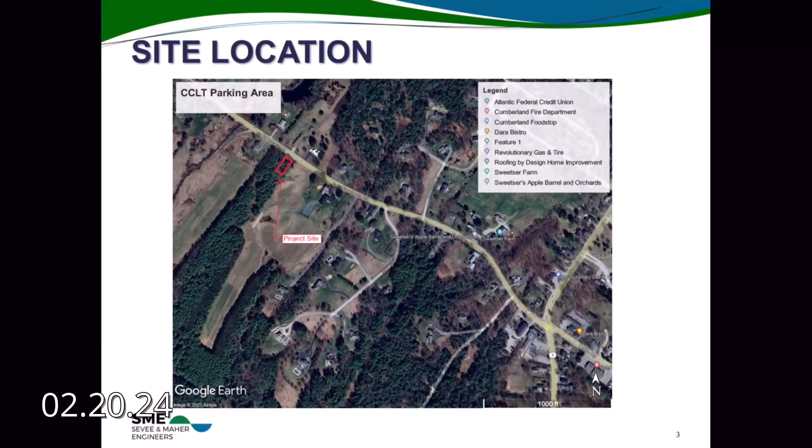Just as a refresher, the red area here is going to be the location of the parking lot. That has not changed since the original approval. What has changed is the location of the parking lot access. The lot is still 8 spaces with 1 ADA van accessible space. Construction will be the same, a gravel buildup with reclaimed asphalt. Some of the disturbed areas, impervious areas, and wetland impacts have changed to reflect the new access location.

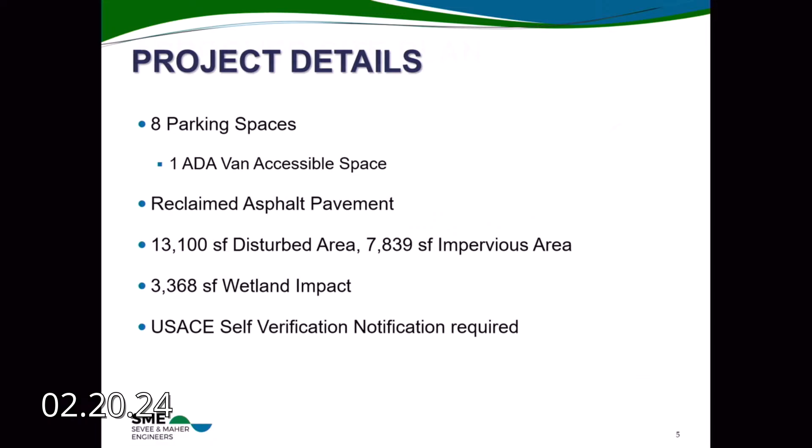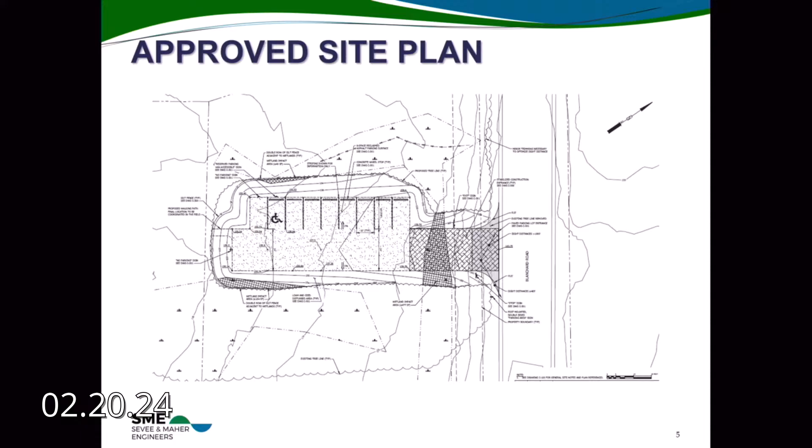Just as a refresher, the original approved site plan looked like this. We had a straight entrance coming off of Blanchard Road down into the 8-space parking lot. Because of the slope requirements and elevation changes, that required a substantial amount of fill underneath the parking so that we would have acceptable grades coming in off of Blanchard Road. What we have done instead, and what we're proposing today, is this configuration. The parking area is in the same spot. We had reversed the hammerhead. If you can see here, my cursor is now on this end, and we shifted the site entrance a little further to the southeast, where we're able to come in over a greater driveway distance, come down to a lower elevation, and save on that fill.

The item that Carla had mentioned, shifting that driveway down on the page, relates to an existing fire hydrant here. Through the peer review comments, we're coordinating both with the local fire department as well as the water district to achieve an acceptable distance off of the pavement. Where we landed is that we're about 4.5 to 5 feet off the edge of this radius. We have a bollard located 3 feet off the hydrant per the fire department's request to protect that.

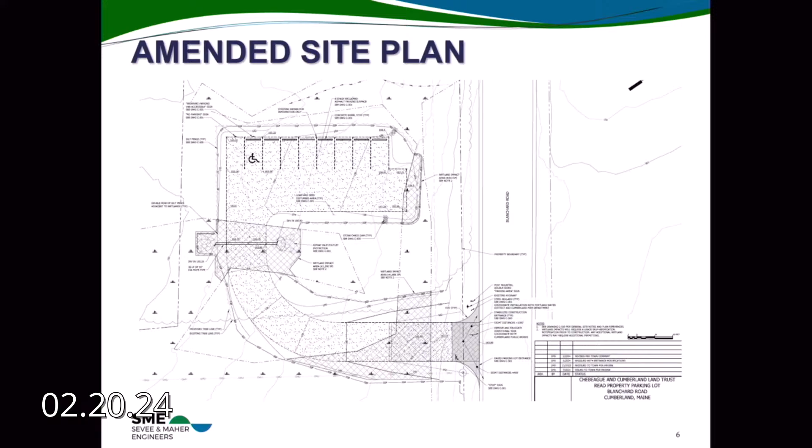I received an email from the water district saying they were satisfied with the changes on Friday. I also received an email from Dan Small, the fire chief, today saying he was fine with the changes. And this is what we're here to present tonight.

So, questions from the board? Quick question. Could you bring up the picture of the amended site plan?

Sure. Could you talk to the new location of the entrance and how it relates to the two driveways on the other side of Blanchard? Let me see if I can, hang on just a minute. I may be able to do this better by pulling up a set of the project plans, because it doesn't show in the slide that I had there. So bear with me here.

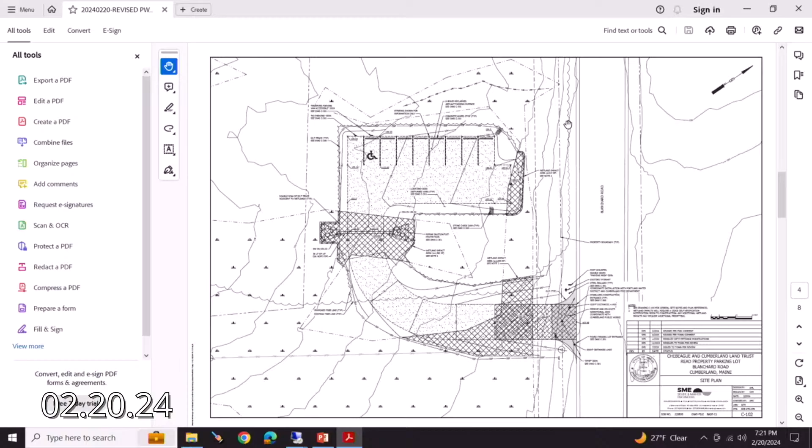Where's my full screen? May not be able to show that on this. Go back to this here. So, if I can zoom this in. There we go.

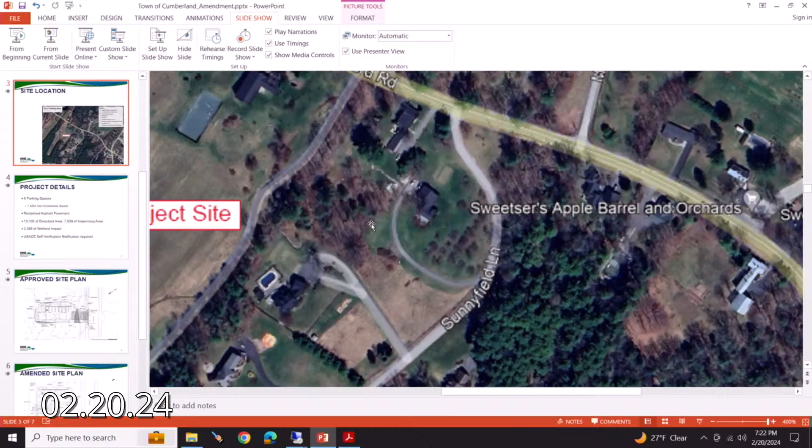You can see here, apologies for jumping around on this. Again, the parking area hasn't changed at all. Where we were coming in previously was off the center of this box, which is a little off from that existing driveway, the longer driveway across the way. This is going to be coming out now a little bit to the south, a little bit more in line, but not quite over as far as this existing driveway on this other side.

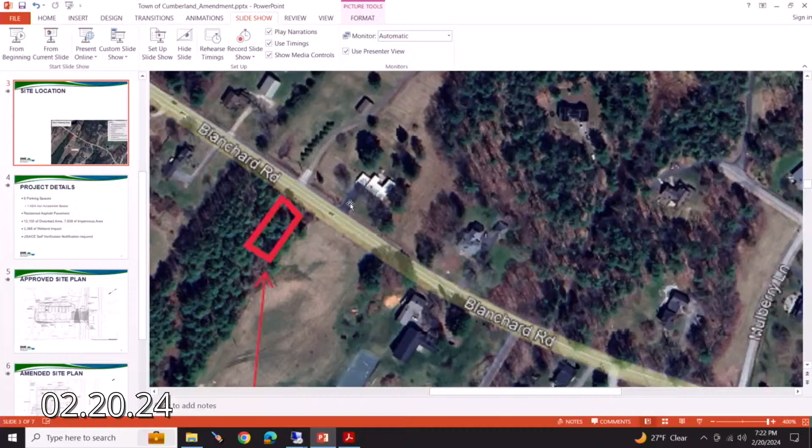Okay, thank you. Sure. Other questions? Paul? Yeah, just a couple things.

In the intro, there's a comment that there'll be a directional sign on Range Road. I think that should be Blanchard. It should probably be Blanchard. Just pointing that out. It might have been on the original.

Next, on the second page, under site plan, there are a number of issues raised by the engineer, one regarding grade. So has that all been addressed? Yes, they have been. In the initial design, we were trying to come down into the property as quickly as we could. We followed a residential access road standard for less than 50 vehicles a day, which included a 3% grade coming in 25 feet off the edge of pavement, and then from there, we came down at a maximum driveway grade of 10%.

In response to the comment, we shifted and adjusted that to the regular site plan standard, which is 3% off the edge of pavement for 50 feet. I'm not sure if you can see it, but we included some spot grades here as well. These spot grades represent 25 and 50 feet off the edge of pavement, and they outline 3% coming into the site. From there, we went to an 8% grade down and around the corner. So those comments have been addressed with this design.

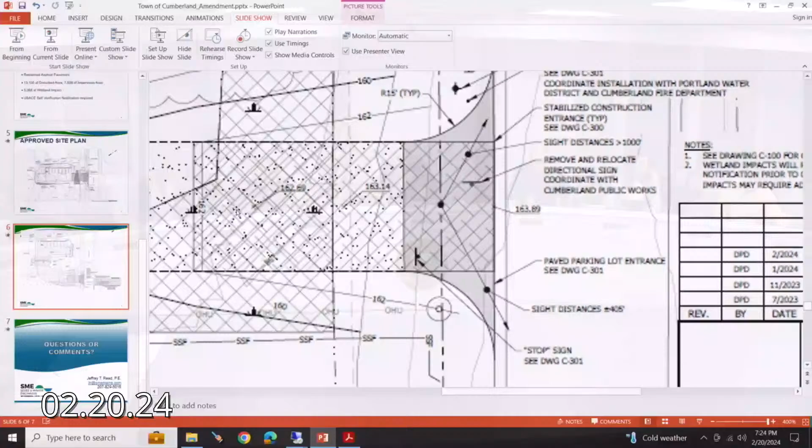Amendment to an approved site plan for an 8-space parking area for access to Rines Forest to be located, okay. So it is 48 Blanchard Road, correct? Yes. Good, okay.

Other questions, oh excuse me. Do you have the letter from the Maine Historic Preservation Commission? Yeah, we submitted that last week.

In the findings of fact, regarding sight lines and utilization of traffic circulation parking, we say that the sight distance is 350 feet in one direction, which would meet the standard, but it would be right at the standard, and 485 in the other direction. In your application, it says 405 feet in one direction and 1,000 feet, or greater than 1,000 feet in the other.

So it's the larger of the two. I mean, I went out there and I measured it myself. Okay, so we just need to adjust our findings of fact. Thank you.

Anything else, Josh? That's all I've got. Any other questions from the board? Hearing none, I will open the public hearing for anyone that wants to address this subject.

Hearing none, I will turn it back to the board. We have no waivers, is that right, Carla? As the town engineer stated, and I highlighted it in your review on page 2, the third waiver was requesting a marking of all trees greater than 10 inches in caliper. The clearing proposed will be minimal, and trees over 10 inches are not common in this area, but he suggests making sure the planning board doesn't want a survey. We already approved them before, just want to make sure you're good with it again.

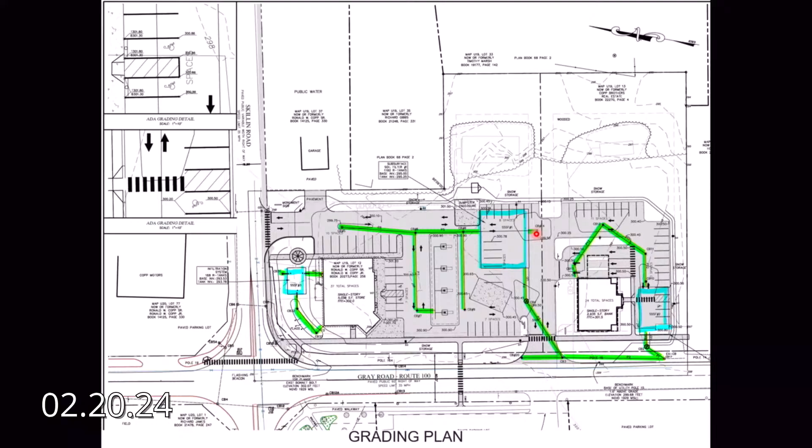The utilities will be mostly extended from the adjacent roads. The blue highlighted lines are water, yellow is gas, and we will come underground from existing utility poles for data and electric. Each site will have its own septic system, set to the rear of the site, designed by Albert Frick Associates.

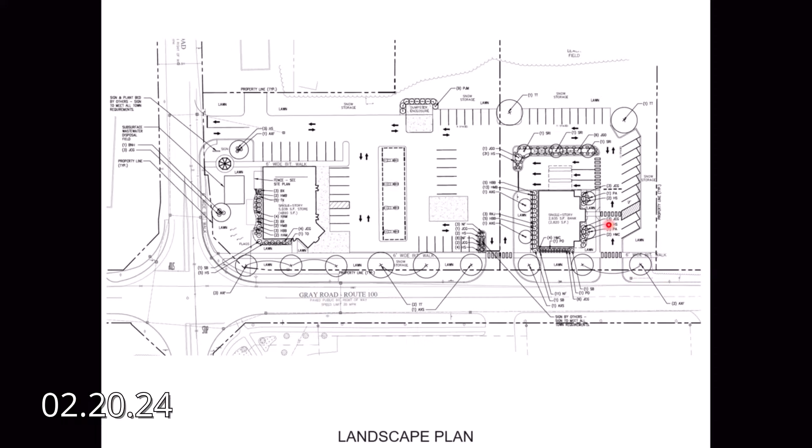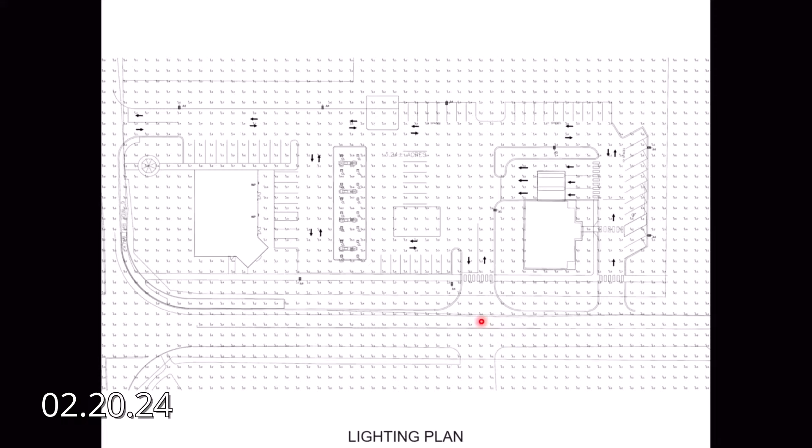Those are going to be set basically at grade, and again, that's part of what the DOT asked for, but it's always a good idea because we're really looking to service the neighborhood, and if folks want to walk to us, they should be able to do so safely.

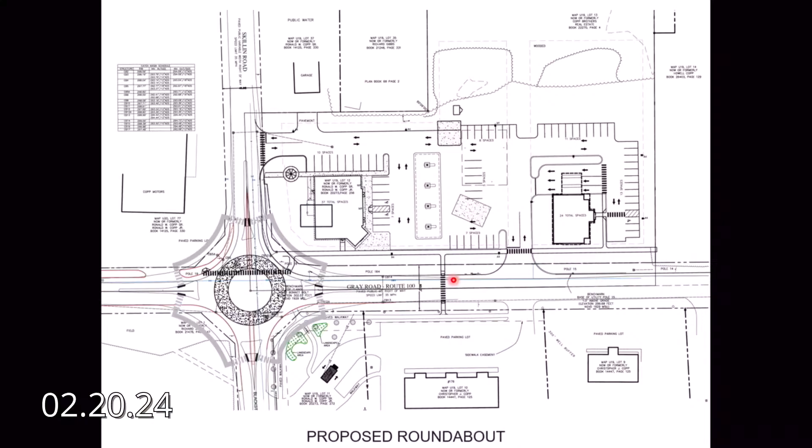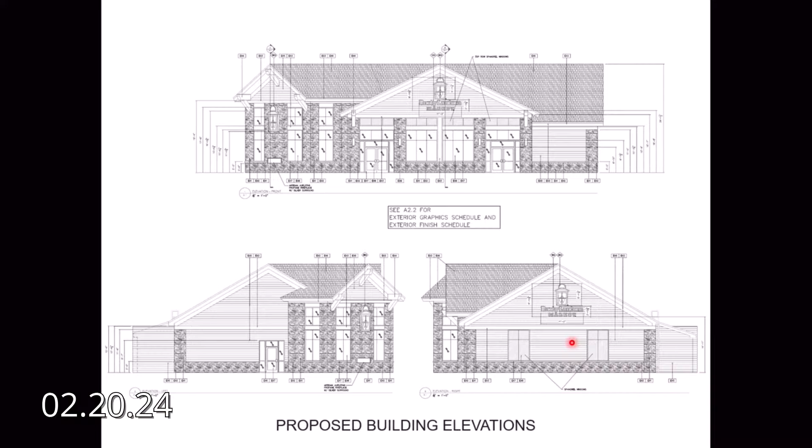So this would be the view from the parking lot, and this is from the side you would see from Skillen Road, and this is the other side. But we've got much better architectural renderings from a company we use called Pepperchrome.

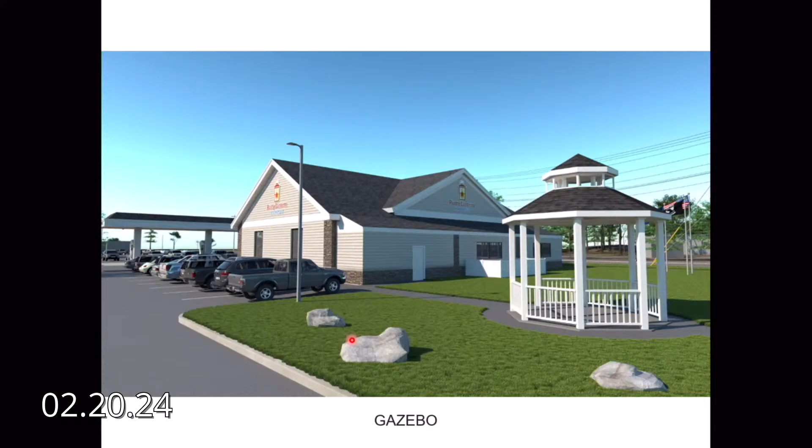We have several more views here, I'll step through. As seen from Skillen Road, you would see where that gazebo was proposed. There's a fenced-off area over here that is where the HVAC equipment will be set at ground level.

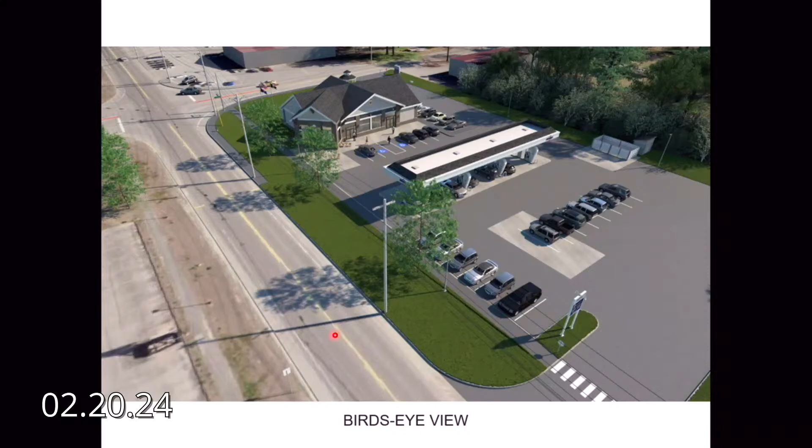A bird's eye view, if you're able to jump real high. It does show the spacing and how things are laid out.

These are the tanks, and realizing that people will likely park out here, we've designated some parking spaces on the plan. It's raised a couple of questions from folks about why they're there and what's the impact of the truck moves through there. If it's something you'd like to discuss or give us feedback on tonight, we'd be happy to hear it.

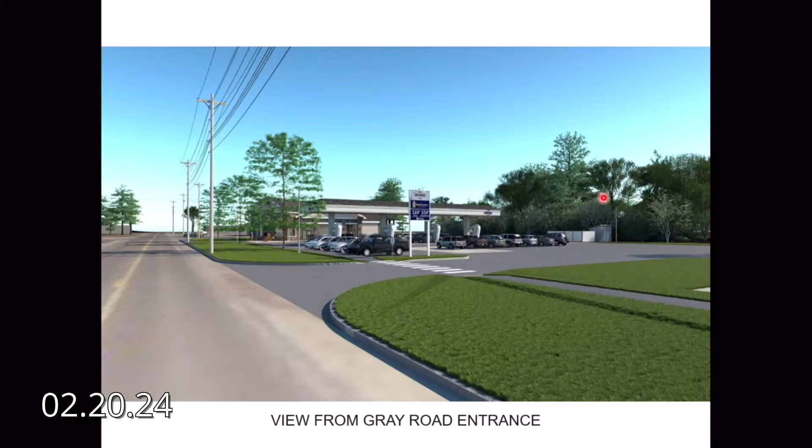Again, the view as if you're approaching from the south. This is not the actual sign, but we are proposing a pole sign here with downward-facing lights.

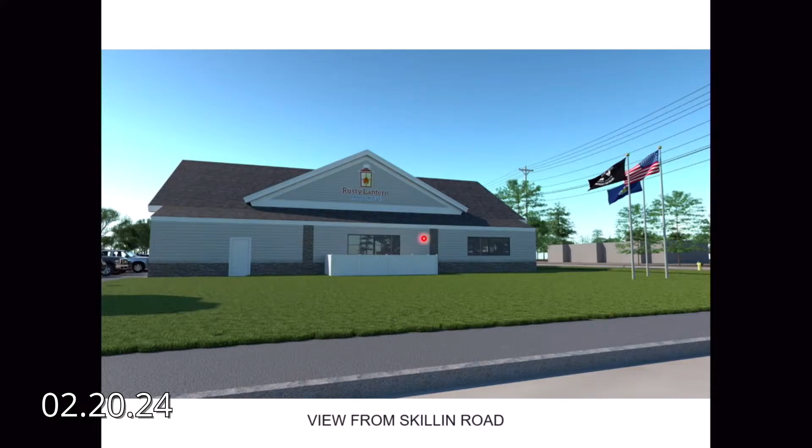This would be a view if you were sitting or approaching the intersection from Skillin Road. Again, fenced-off HVAC equipment.

We'd like to put flags on the corners of these — I don't know if you've been to the Lisbon store, you'd see that there. This is the cross on Blackstrap Road, looking back at the site.

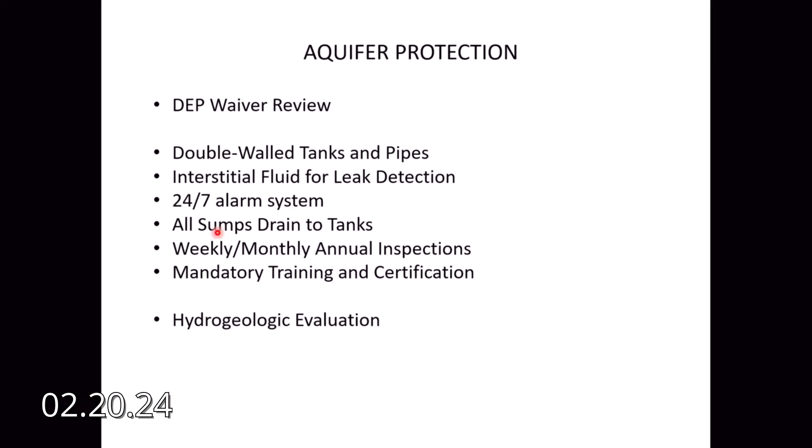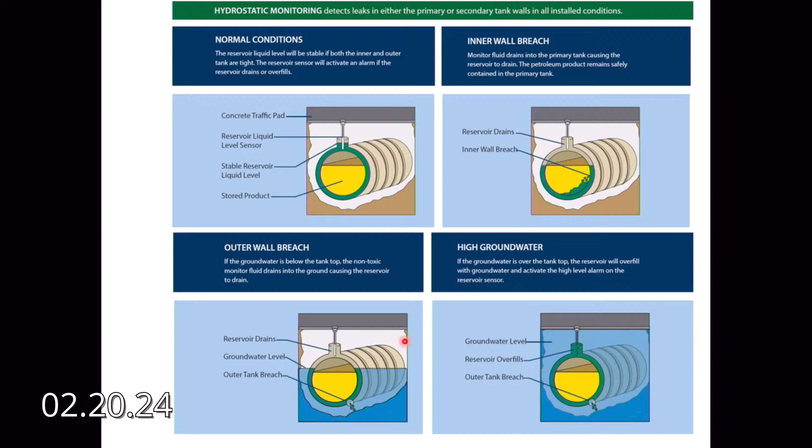So with this double wall tank technology and double wall piping, I don't know the statistics in Maine, but we just did one of these in New Hampshire, and they had not had a leak that got into the environment since they started mandating them about 15 to 20 years ago.

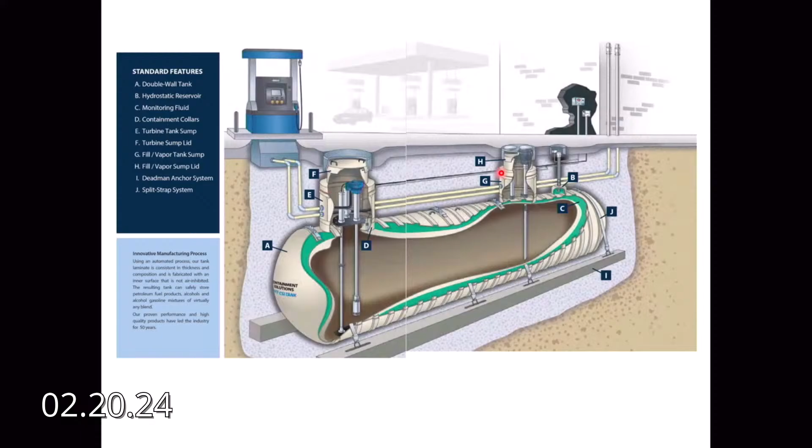That's just another picture kind of showing the same thing. You can see the green areas. Underneath each of the dispensers, there's also a sump, so that if anything were to drain or leak internally, it drains back to the tank. This shows vents, and this shows that you would have the alarm panels inside the building. So the technology has really come a long way. These tanks are inspected weekly at the fuel ports, monthly, and annually. The DEP only allows them to be in the ground for a certain amount of time - 20 years, unless you get a 5-year extension. So they're closely monitored to make sure they're safe, regardless of whether or not you're in a designated aquifer protection zone.

In addition to that, these are just some of the products that Rusty Lantern has to train and help people in case of a problem - a heavy emphasis on safety procedures, training and certification, guided both by the state and the EPA. So every operator there, meaning anybody who works at the gas station or convenience store, has to have proper training and know how to respond if there's any sort of incident, and again, frequent inspections.

So in addition to that technology, I just want to turn it over briefly to Lisa Jacob with Sevee & Maher, who with her colleague helped prepare the hydrogeologic study.

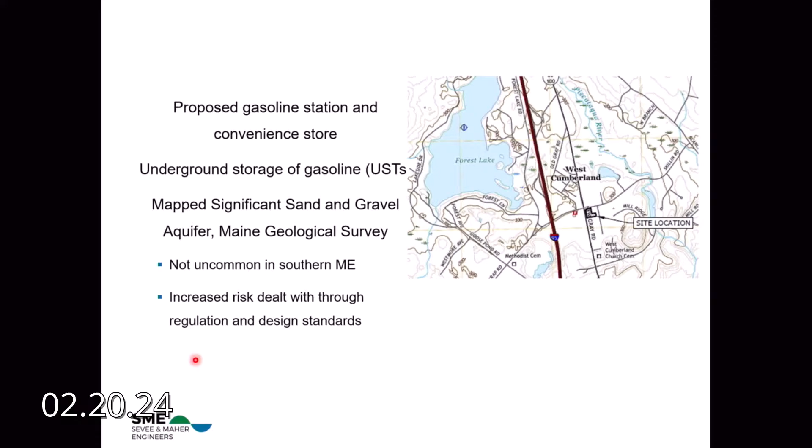A couple of examples of that include in Cumberland and surrounding towns, including in Gray and also in Windham.

We've got the site location here called out, if you can see me moving around. The site location within the Maine Geological Survey mapped sand and gravel aquifer is in the yellow.

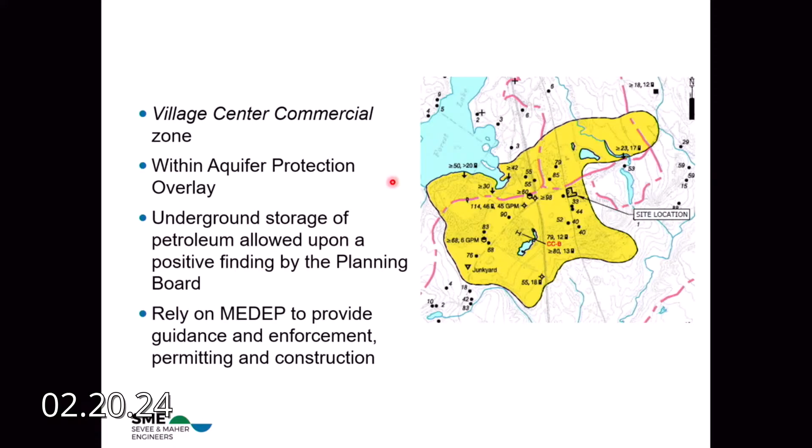This slide is meant to cover Cumberland zoning and aquifer protection matters. As we know, the proposed location is in the Village Center Commercial Zone. It's within the Aquifer Protection Overlay. Underground storage of petroleum is an allowed use upon a positive finding by the Planning Board that the use would not adversely affect groundwater. We understand that the town would rely on Maine Department of Environmental Protection to provide the guidance and enforcement that would govern the permitting and construction of underground storage tanks in the aquifer.

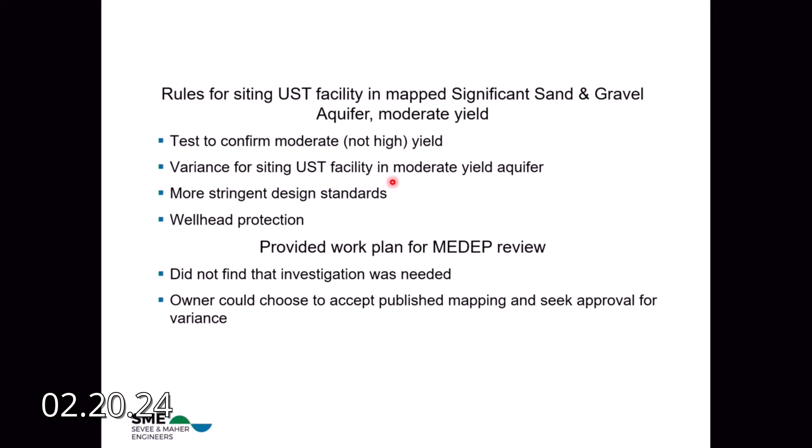The next slide is meant to cover Maine DEP requirements - the rules for siting a UST facility in a mapped significant sand and gravel aquifer of moderate yield. The requirements would include testing to confirm it was a moderate rather than a high yield aquifer, application for a variance for siting a UST facility in a moderate yield aquifer, more stringent design standards for the tanks themselves, as Kurt was walking us through some of the additional features, and wellhead protection.

We had provided the work plan for the hydrogeologic investigation for the Maine DEP to review. They did not find that investigation was needed, and they provided the opportunity for the project owner to choose to accept the published mapping and seek approval for a variance on that basis. The project owners decided they would move forward with the geologic and hydrogeologic investigation to better characterize the site, to understand groundwater direction and general velocity, and to be able to answer questions that may come up as part of this process.

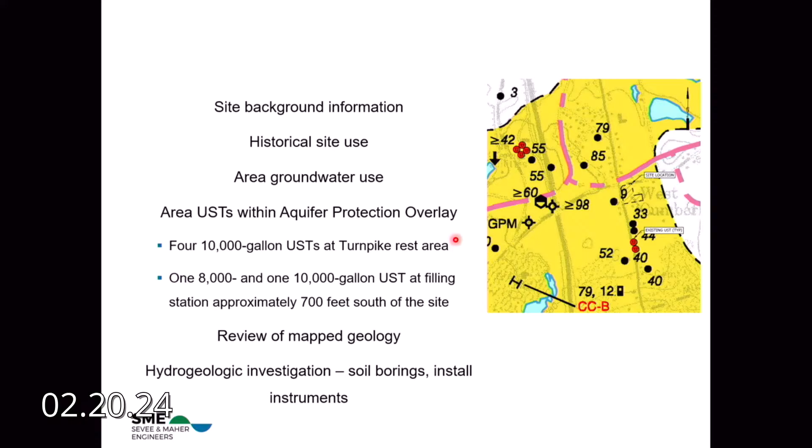There are four USTs of 10,000 gallons each at the Maine Turnpike rest area, and there are two USTs, 8,000 and 10,000 gallons in size, at a filling station about 700 feet south of the proposed site. So we took a look at USTs that already exist, mapped geology including the Maine Geological Survey sand and gravel, the surficial geology, and the bedrock geology. Then we planned this hydrogeologic investigation, including soil borings and installing instruments to be able to take readings from.

We established 4 soil boring locations at the approximate corners of the active site, drilled and observed and classified soils at each, and drilled down to a confining layer. In the southwest corner, we reached bedrock, which was the confining layer. In the other 3, we didn't reach bedrock, but reached a clay layer. In each case, bedrock or clay would confine the flow of groundwater. So we drilled down to a confining layer, classified soils, and installed instruments for future measurements for the hydrogeologic investigation.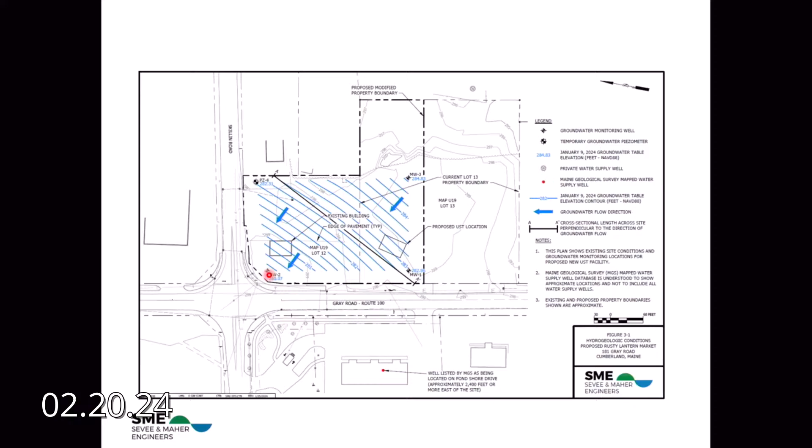This isn't meant to discuss soil and water quality, which were not the primary focus of this investigation. This investigation was planned to look at geology and hydrogeology, prior to when the property owners engaged in environmental due diligence. They hadn't yet conducted a Phase 1 environmental site assessment. So we started drilling in the northwest area of the site and made observations of evidence of contamination.

This was based on field screening, visual and olfactory observation, and screening with field instruments. This contamination was in the soils above the water table, and in soil and groundwater at the water table in this one location. We communicated our observations to the project owners.

They communicated with the property owners, had discussions, and identified that the property was developed as a gas station in 1957, I believe under previous ownership, and operated until 1989 when the tanks were removed.

Since the time of our field work for this investigation, the project owners have embarked on environmental due diligence, launching a Phase 1 environmental site assessment that is underway now, reviewing environmental records of the property and any state, federal, and local records relating to the site or surrounding properties. The project owners have also engaged us to conduct a baseline groundwater quality monitoring program, which is underway right now. Again, this wasn't the primary focus of the investigation, but there were observations we can share with you at this point.

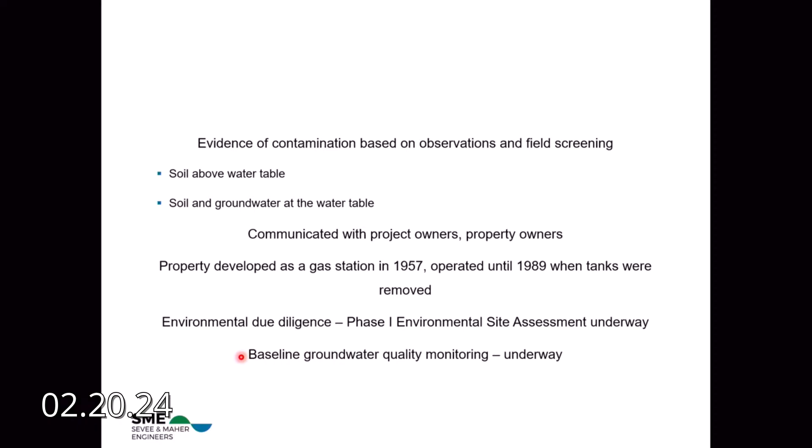And then the primary focus was, in fact, the hydrogeology. Here are some of the summary statements of what we found.

The average saturated thickness of permeable soil — these are the sand and gravel soils that make up what the Maine Geological Survey has mapped as a significant sand and gravel aquifer — averages about 6 feet in thickness over the 4 soil borings that we drilled and installed.

The water table is between 15 and 19 feet below ground surface, and the clay or bedrock confining layer we mentioned is between 20 and 26 feet below ground. So, water table 15 to 19 feet, with an average of about 6 feet of saturated thickness. We're headed toward the margins of the aquifer at this location, which is consistent with how it's mapped on the Maine Geological Survey mapping.

Groundwater flow direction is to the northeast — I'll show the map again in a minute so we can look at this in plan view — to the northwest. And the average linear groundwater velocity is approximately 2.4 feet per day.

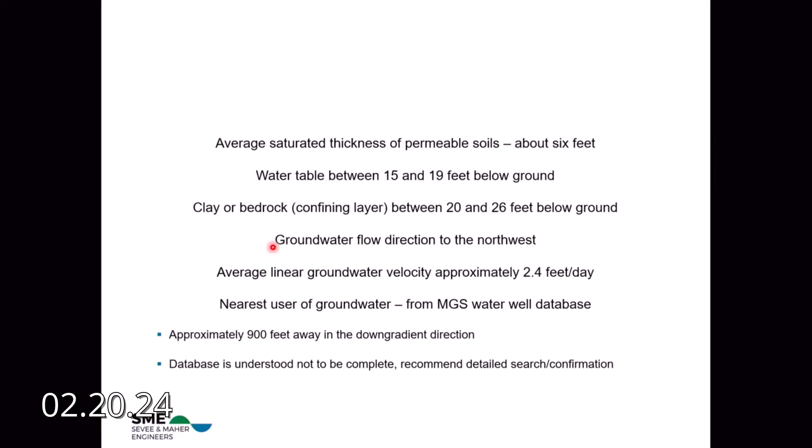The nearest user of groundwater, based on the Maine Geological Survey water well database, is approximately 900 feet away in the down-gradient direction. I'll stop here to issue an apology — we found a typo in our report in 2 places where instead of 900 feet, we wrote 1,900 feet. Apologies for the trouble. We've let Kurt know, and we'll issue revision pages that should make their way to the information you have. But it's 900 feet away in the down-gradient direction.

We understand that database is not considered complete, so one of our recommendations has been to do additional detailed search and confirmation of users of groundwater. The nearest user of groundwater in the up-gradient direction is a water well on Kathy Lane, about 314 feet from the edge of the tanks, from the nearest part of the tank. Again, this is in the up-gradient direction.

Groundwater is, according to the observations from this hydrogeologic investigation, moving from southeast to northwest. Let's see what else I wanted to call out to you — those were all of the summary points I had set aside. I can stop there and either turn it back over to Kurt or hear questions.

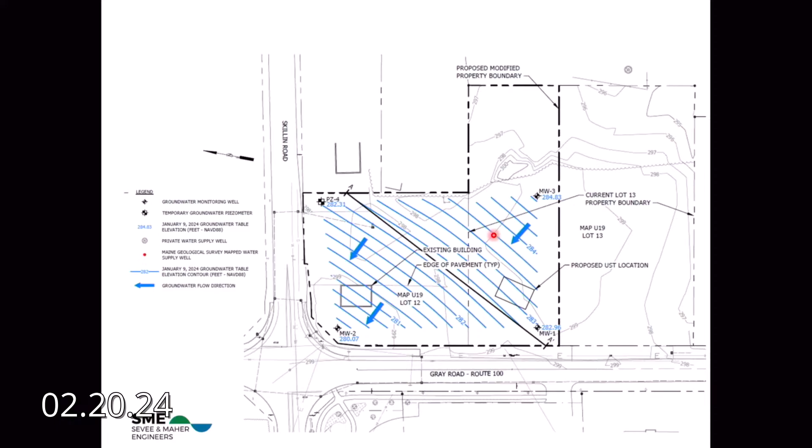Why don't we go to Kurt, and then we can do the... Thanks very much. Thank you, Lisa.

So I'm not going to go through this in depth. Carla asked that I consider the Route 100 design standards as it applies, and certainly when we come back, have a much more detailed review of that. But just looking at them in general, this site does comply or addresses those.

We've limited the number of entrances. We've shared the driveways. We're going to have a good landscape plan around it and a common appeal of the buildings, with parking to the sides and rear.

But I wanted to bring it up just in case anybody had been reviewing the packet. And by the way, I apologize for that packet. That's probably the thickest packet I've submitted in quite some time. I don't think I've ever had to use 2 binder clips before. But a lot of data.

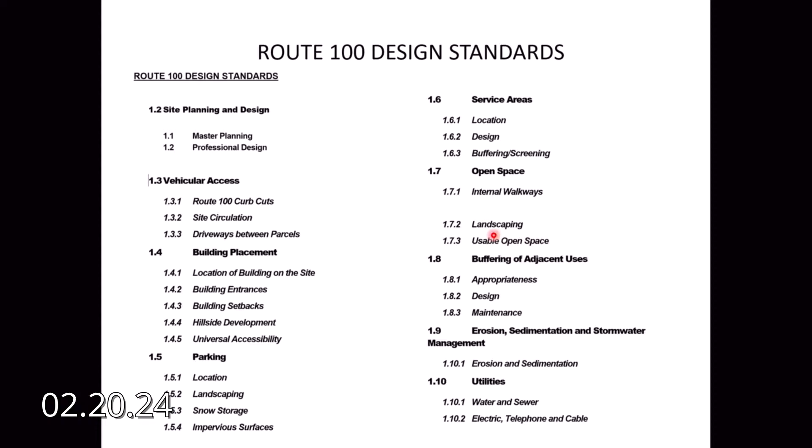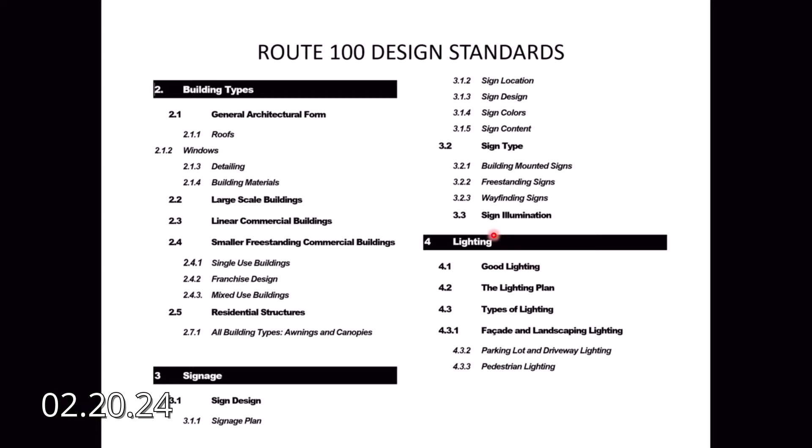If anybody had seen something they had a question about the applicability of those, I'd be happy to hear it. So when we come back, we've got it thoroughly addressed. The building is, I think, a little bit of an interpretation of classical New England style. But I hope you see the effort that's gone into making it a very attractive building.

And the last thing I'll mention here, as Carla had it in her memo, is that we had 2 waivers originally requested. There were some other waivers that the peer reviewer said we should consider asking for. So in addition to the high-intensity soil survey and the market study, they noted that the interconnected driveway, which I think is the common entrance, is wider than 24 feet, and that combines with the combined entrances wider than the total of 60 feet.

And the reason for that is to be able to maneuver the refueling trucks back out of the site without running over curbs and getting onto the highway. So the primary entrance off of Gray Road is 32 feet. We could probably look at doing some sort of mountable curb, but in order to get that truck maneuvering out, we would be asking for waivers for 62 feet over 60 for the total entrances and that one entrance.

Also in the sign ordinance, and Carla, you might be able to help us if we got this right, it says that in that zone, signs are not supposed to be illuminated between 10 and 7. And as a 24-hour business, we would ask for a waiver to allow us to have the downward illuminated sign on during all our business hours.

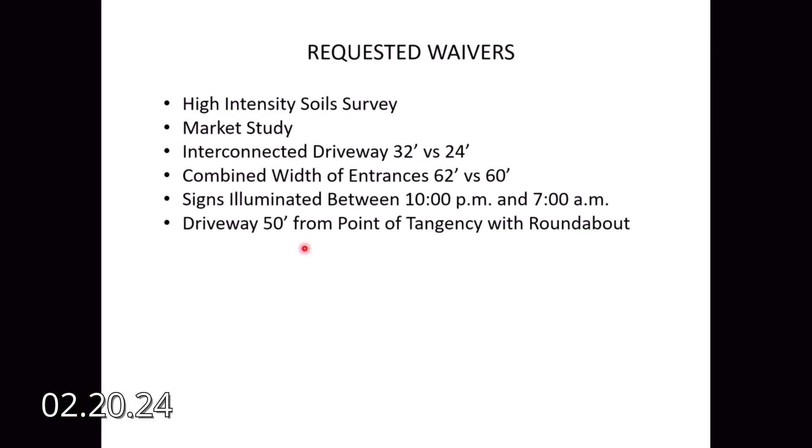I think that is everything we had. I just want to say that I know the peer review engineers have provided quite a few comments. We've addressed most of those. Knowing that this is a sizable project, we said we would like to go ahead and have this meeting with the planning board tonight, so that any questions from the board or the public that we can accommodate and would alter the plan, we get them all back in one response to the peer review engineer and have that all buttoned up before we come back. Thank you. Thank you.

One thing that a lot of you may not know is that the town hires an independent engineer to review all of the technical and a lot of the other aspects of this plan. So obviously, most of us don't have engineering degrees other than from the Wheaties Box Top School of Engineering, so we don't totally take this at face value, but we have an independent person to look at these.

And I think Carla is our peer review person here tonight. He's not. He's not. But we'll try the best we can when we get into the public discussion of trying to answer these questions technically, because a lot of times there's a lot of conjecture and you kind of want to hear from the engineers, and I think we've got a pretty good education today, like on fuel tanks or such. So that being said, I'll turn it over to the board for questions or comments.

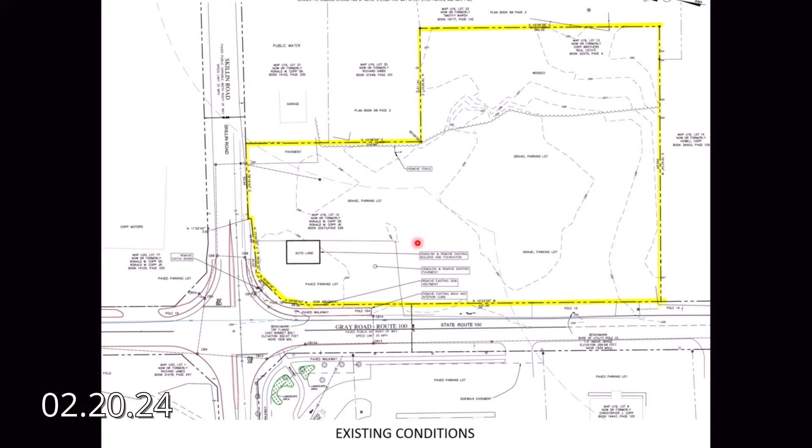The flow is a happy circumstance in that it's all flowing, say, towards the intersection and beyond. So in this plan, it would be heading top right to bottom left, so it is going away from all of the wells. It doesn't affect that—the 300 foot requirement doesn't change, it's not shortened or lengthened. But the fact that we know which way the groundwater is going, through their work, at least provides another level of comfort.

Okay, let me ask one other question, kind of anticipating concerns. You mentioned New Hampshire—this double, it sounds very impressive, the way it's described and the illustrations you showed. You mentioned New Hampshire, 20 years, never a failure. Do you know of any failure of this type of system in the United States ever?

I don't know. If I were a betting man, I'd say it's happened. But all the information I know - I asked the DEP to give me a statistic back, and they haven't yet. I will get that and put it in.

Is there such a thing as, instead of underground storage tanks, above-ground storage tanks for this type of operation? Presuming that's not allowed, but I had to ask. I can't say it's not allowed, but the measures you have to do are much worse - you have to have a containment system all the way around, in case they leak. Yeah, it's kind of a mess.

Thank you very much. Josh?

So the store hours are 24 hours a day, 365 days? Yes. Okay, so there's always going to be somebody there monitoring wherever that alarm is. Yes.

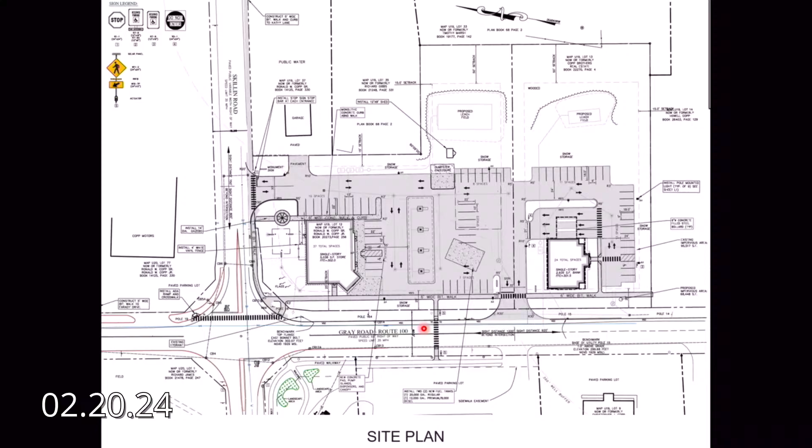Will you have EV charging stations? At this point, no, but we are planning for them. We're going to have conduit that runs from the pole to the backside where these 8 spaces are located by the dumpster enclosure - that would be the logical place to set them up. But currently the demand is unknown, and frankly the price upon first opening is pretty prohibitive. We are planning to add those in the future.

Okay, so you're setting up for that, is what you're saying. Yes. Let me see - why would we want to waive the market study in this case?

The company that... I mean, they must have made a market study, or you must have made one. We have had one done, and I'll let my boss explain that one better. I'm the technical guy.

Hi, I'm Jim Howard with Priority Group, and actually I'll be the one that owns the store. I own almost all the Rusty Lanterns that we build. They're not a franchise like Dunkin' Donuts or McDonald's. They're owned by one guy, John Cook, whose office is in Brunswick. We are the preferred developer for him and Irving Energy - we build the stores, own them, and lease them to those guys. So they're not an actual franchise.

And you're talking about a market study for the property, for the business, as to how well it'll operate? I actually have one, and I'll get it to Kurt. I'm not sure Kurt knows that we have done one, but I'll get the market study done and submitted to you. We do one for every property we decide to build a store on. Okay, very good, so we can get you that.

Bridget, do you have anything? Yeah, I was just hoping Bill or Carla could give us an update on the roundabout. Bill doesn't have a microphone, but do you want to go to the podium? I want to sit next to you.

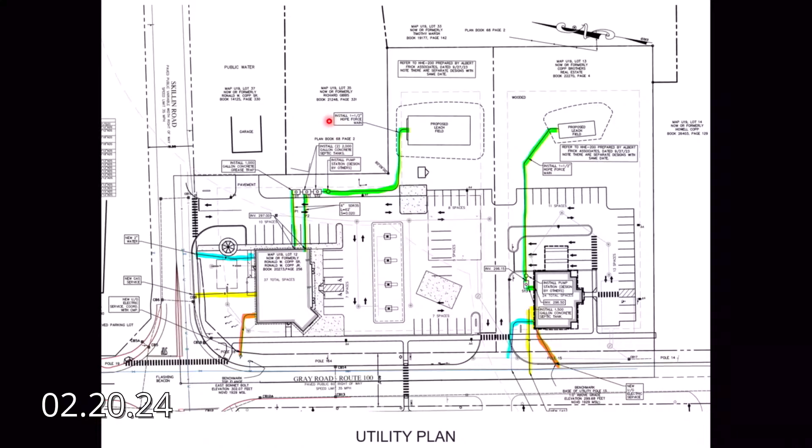Yeah, I guess I'm just a little concerned that it looks like there's pretty good buffer between the back part of that property and most of the properties on Kathy Lane. But it does look like, and we kind of want assurance, that there's some deciduous trees there. So I am a little concerned of the lack of buffering, maybe for Mr. Gibbs's property. We kind of need to make sure that's okay.

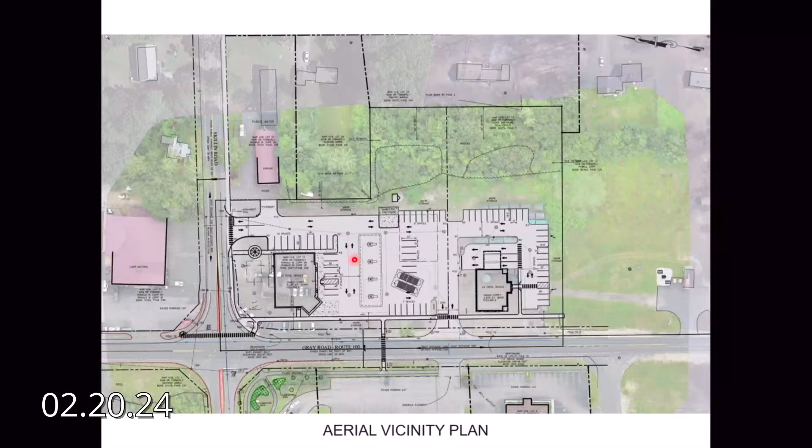And then the other one for the Kathy Lane people is the lighting. I mean, the buffering will take care of some of it, but my understanding, from my engineering degree, is that lighting can be focused downward so that the light pollution for those folks is minimized. The other side of the road is all commercial, but I want to make sure these folks on Kathy Lane aren't looking into lights. When we did the school project on Main Street, we had 2 or 3 neighbors across the street that had legitimate concerns, and we were able to do down lighting. So I just want to make sure that's taken care of, and I assume with the traffic study and everything, as concerns come up from the public, that those are addressed.

So I think those are mine. I mean, I think we're all concerned about the groundwater and the tanks and everything, and that more work has got to be signed off on by DOT, and your traffic stuff and environmental protection has got to be signed off on. So, anything else from the board?

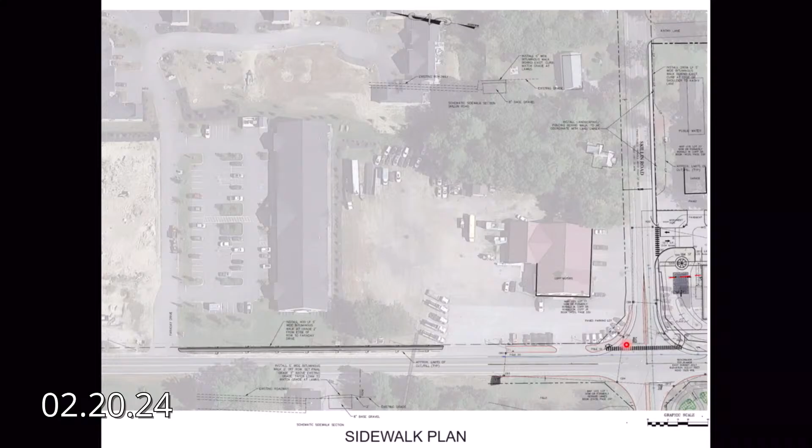If the roundabout goes forward, that plan includes sidewalks on the other side of the street, and it extends much further south on Main Street and further east on Skillin. But they're only asking this project to connect to Kathy and Faraday. Okay, all right, that's fine. I was just trying to figure that out. Certainly, thank you, that clears that up.

Okay, anybody else? Somebody there. Yes, come on up.

I'm Rory Lee, and I live at 18 Faraday Drive with Ross and the sometimes noisy dog. He's getting better, though. He's a service dog in training, and he's alerting me that there are people. So we're working on when it's appropriate to do that.

I'm very glad to hear that you are concerned about the neighbors and the light. With a 24-hour operation, especially in the summer when people are out late sitting on the patio and it gets noisy, you might want to consider some kind of restriction. I know it's pretty noisy late at night when things are brought in. We're right behind Copp Motors, so some people are disturbed by that pre-existing delivery of destroyed vehicles late at night. But I'm really concerned that the development is in harmony with the people who have been living there, including relatively new residents over the last 3 or 4 years. We're concerned about the quality of life, so light pollution is an issue and noise pollution is an issue. I hope you will also consider noise with that 24-hour operation.